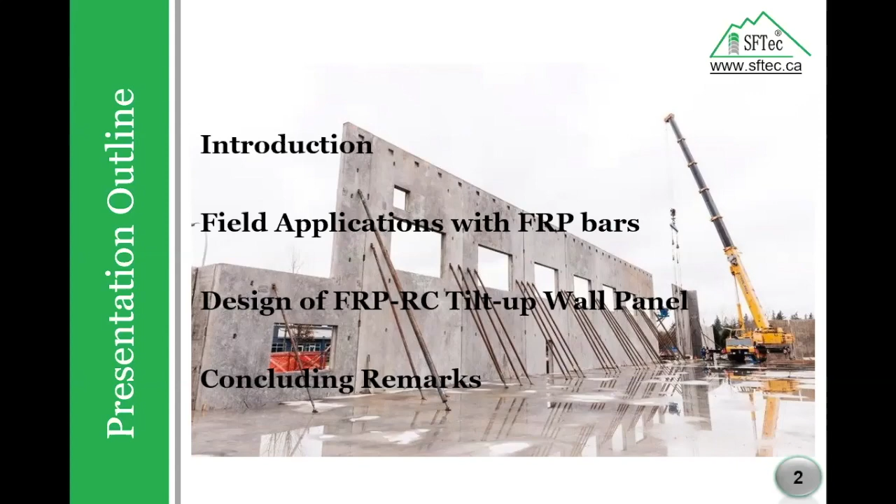Today I am going to talk about design of tilt-up wall panels using fiber reinforced polymer bars. In the next slides, I will go through a brief introduction, field application with FRP bars, design of FRP-RC tilt-up wall panels, and finally I will give some concluding remarks.

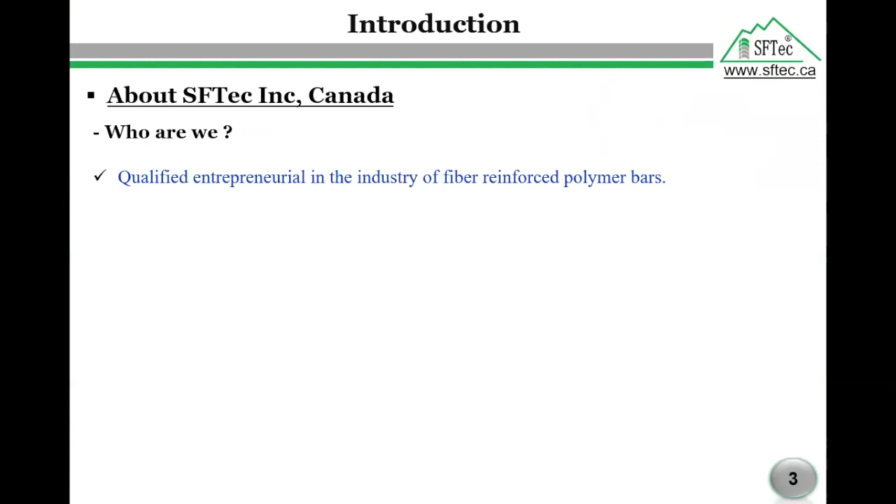I would like to introduce our company, SFTec. Who are we? SFTec is a professional entrepreneurial industry in the business of composite rebar. What do we do and who do we work with? SFTec is working closely with national and international engineering firms and government departments in the construction of parking facilities, water treatment plants, and retaining walls, as well as other structures in the field.

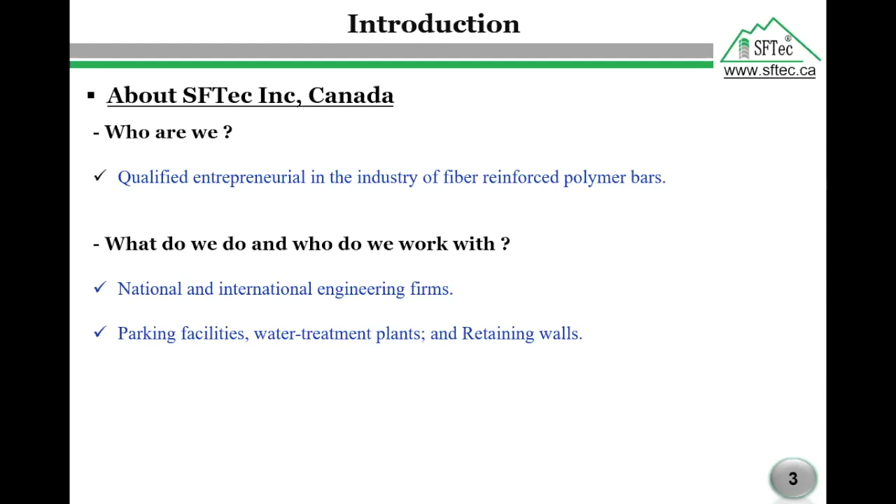What is our focus? SFTec is focusing on the market of FRP rebar application in North America and beyond, through providing complete design for new structures reinforced with FRP bars, and conducting research and development strategies to ensure continuous improvement of SFTec products.

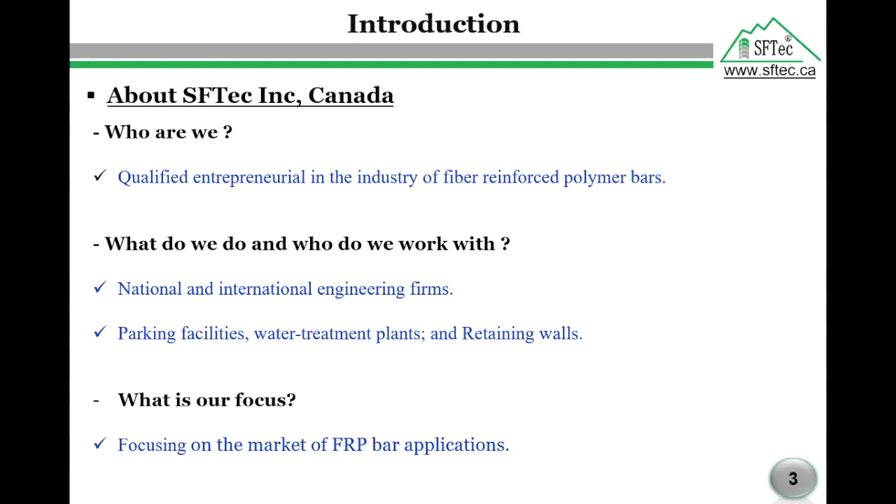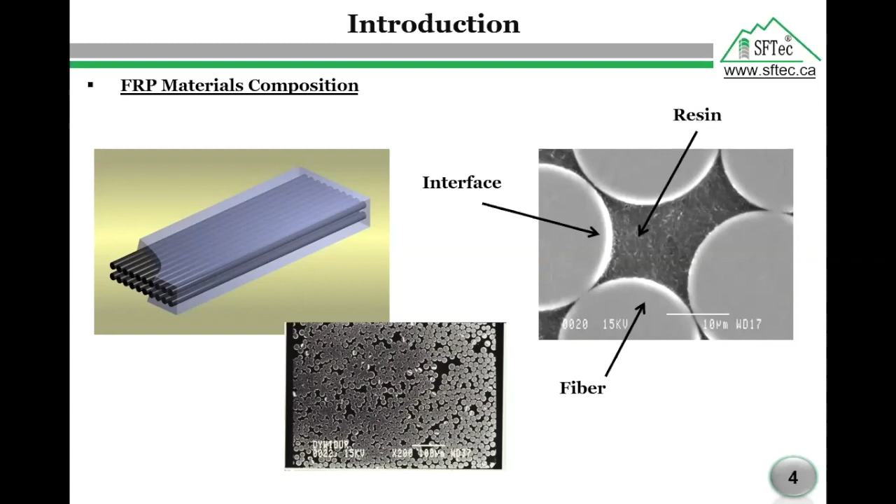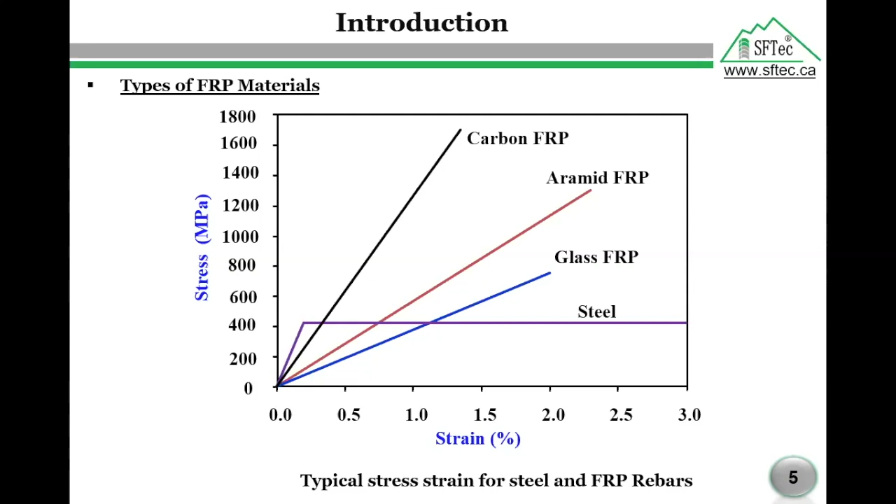In our presentation, we will focus on the FRP bars. What are the types of FRP? In the market, we have types of FRP: glass FRP, aramid, and carbon, and recently we have a type called basalt FRP. As we see in this stress strain curve for steel and FRP bars, there is only one difference between steel and FRP bars: the FRP bars are linear up to failure without any ductility point or yielding.

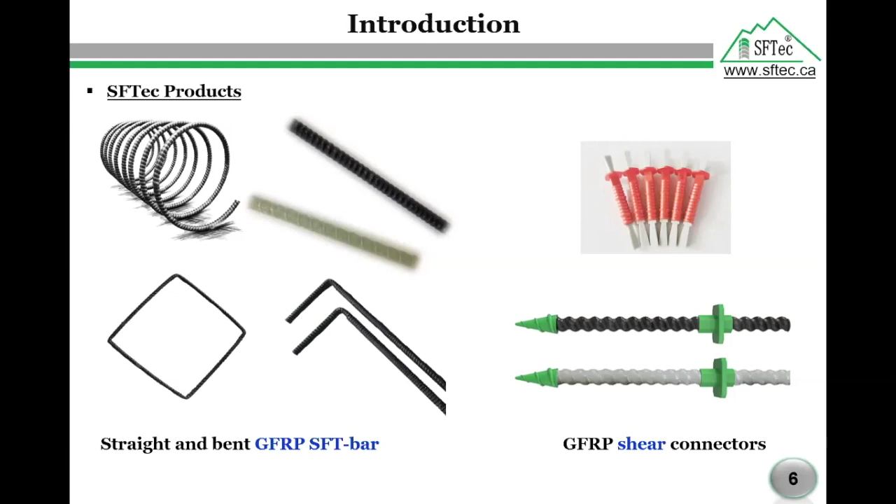In our company, we are mainly focusing on the production of GFRP materials as straight bars, bent bars, closed loops, and spirals. We also have a product called GFRP connectors for sandwich panels.

Why must you use GFRP SFT-bar instead of conventional steel bars? In the last 10 years, FRP bars have been used successfully in hundreds of bridges, parking lots, tanks, and marine structures across Canada and US, as well as other parts of the world.

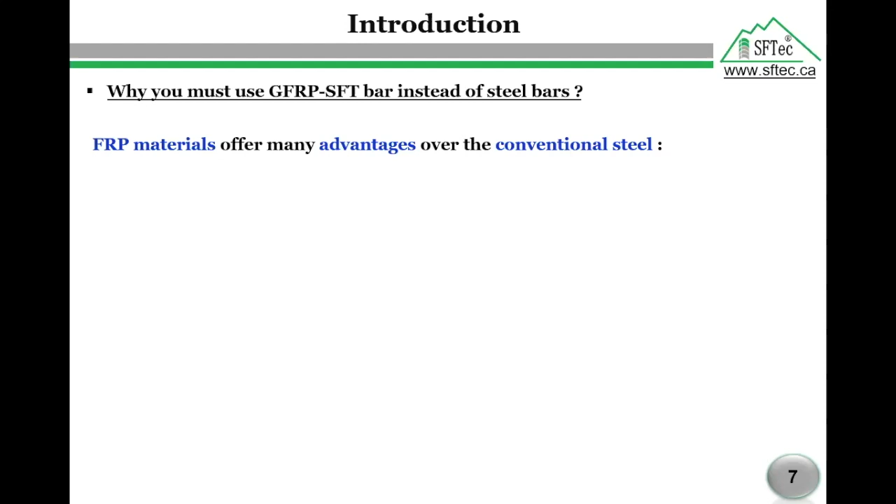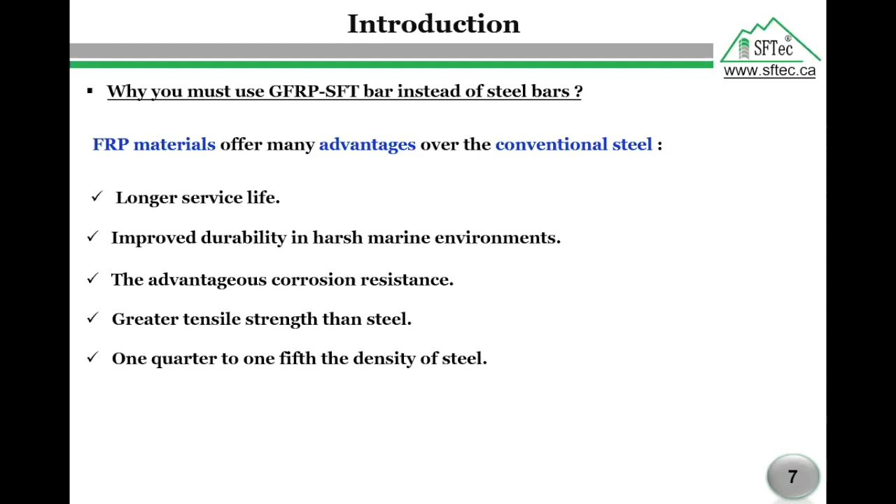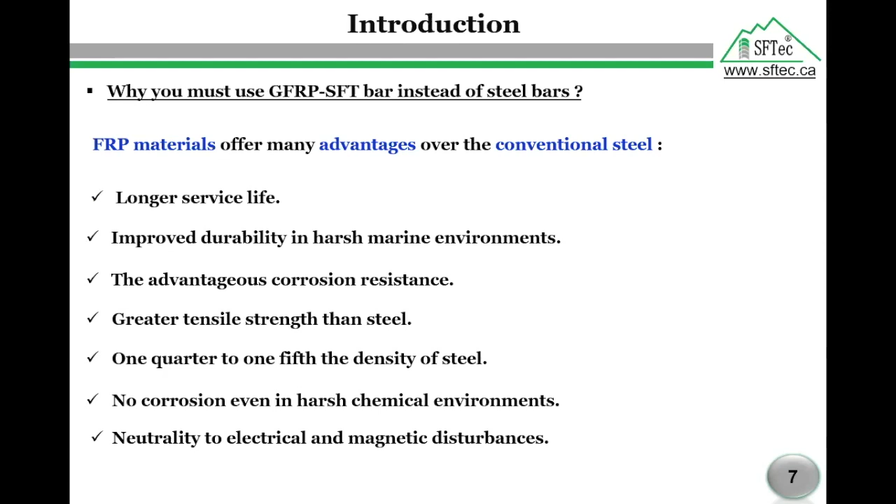FRP materials offer many advantages over conventional steel bars, like longer service life, improved durability in harsh marine environments, the advantage of corrosion resistance, high tensile strength compared to the yield stress of steel, lighter than steel, no corrosion even in harsh chemical environments, and neutrality to electrical and magnetic disturbance. SFTec product versus existing standards.

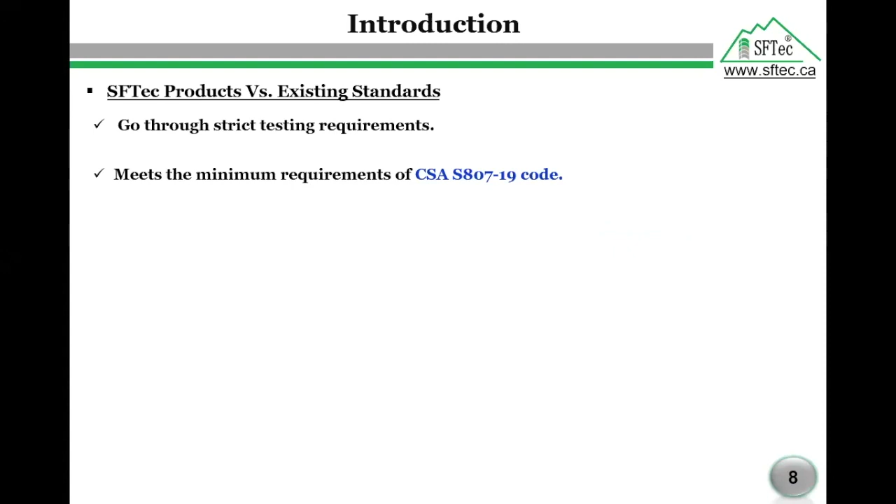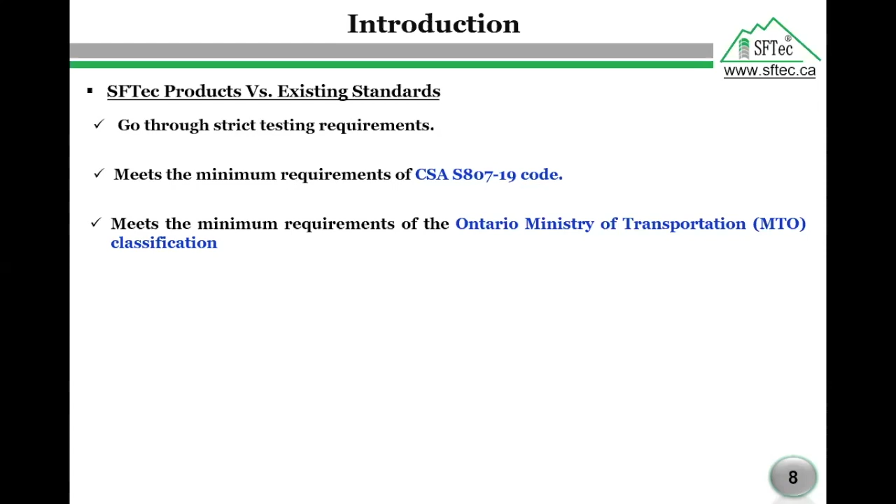Our materials go through strict testing requirements before they are approved for the market as a cost-effective reinforcing material instead of corrosive steel bars. The bar satisfies the minimum requirement of the specification for fiber reinforced polymer code CSA S807 to the year 2019. The bars also satisfy the minimum requirement of the Ontario Ministry of Transportation in Ontario province.

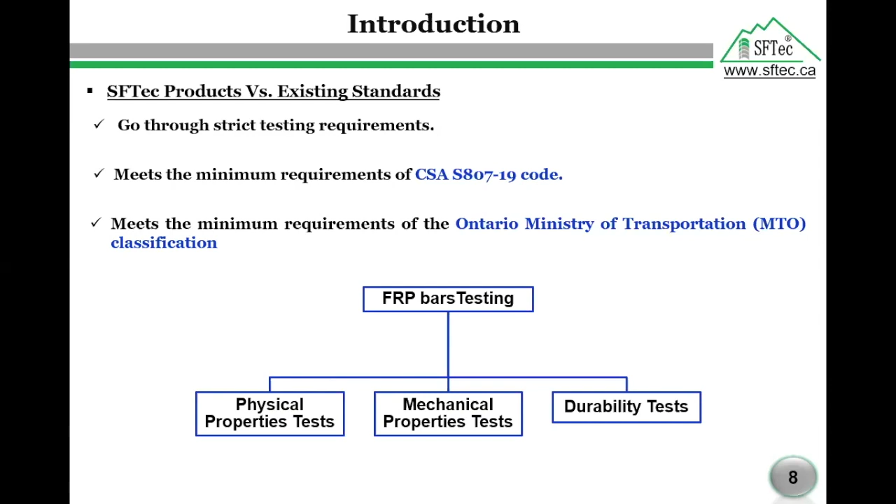The FRP bars testing are classified into three categories: physical properties test, mechanical properties test, and durability test.

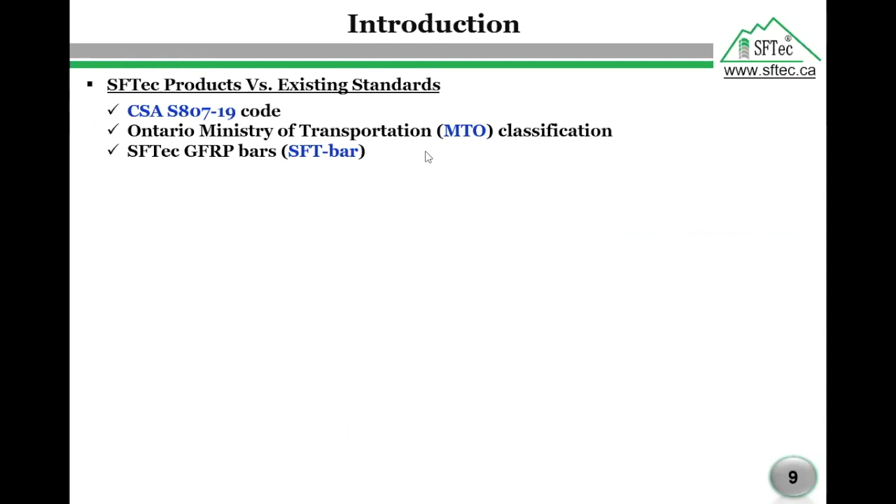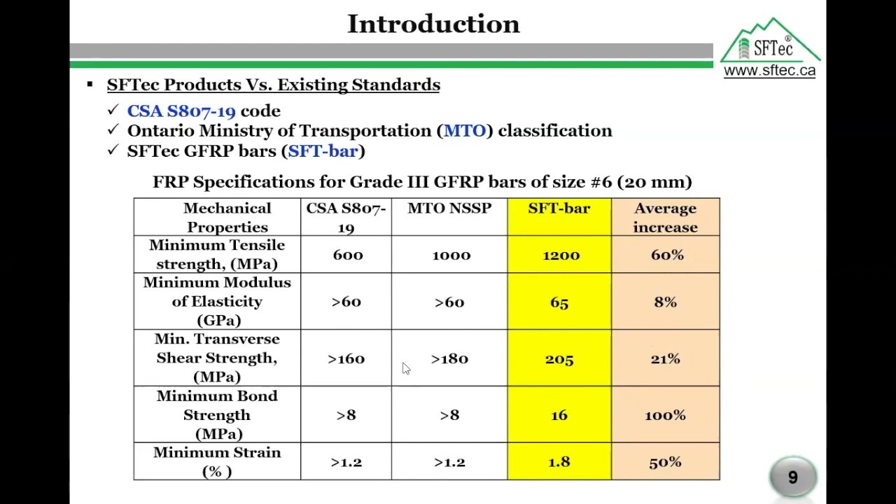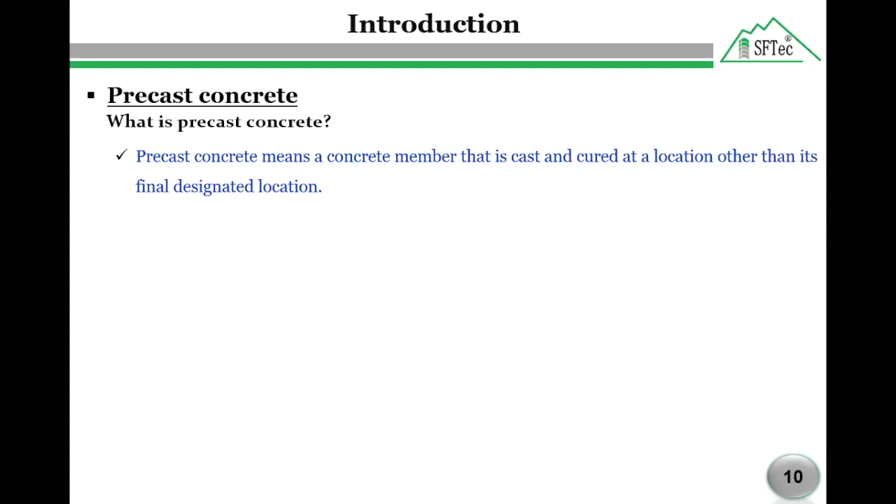Now I will talk about precast concrete. What is precast concrete? Precast concrete is a construction product produced by casting concrete in a reusable mold or form, which is then cured in a controlled environment, transported to the construction site and lifted into place. In contrast to standard concrete, which is poured into site-specific forms and cured on site.

What are the types of precast concrete? Precast concrete members are classified into: number one, architectural precast concrete; number two, structural precast concrete. The architectural precast concrete refers to concrete elements that are used as non-structural cladding elements, and their most common use is in precast curtain walls, as we see here on our left side.

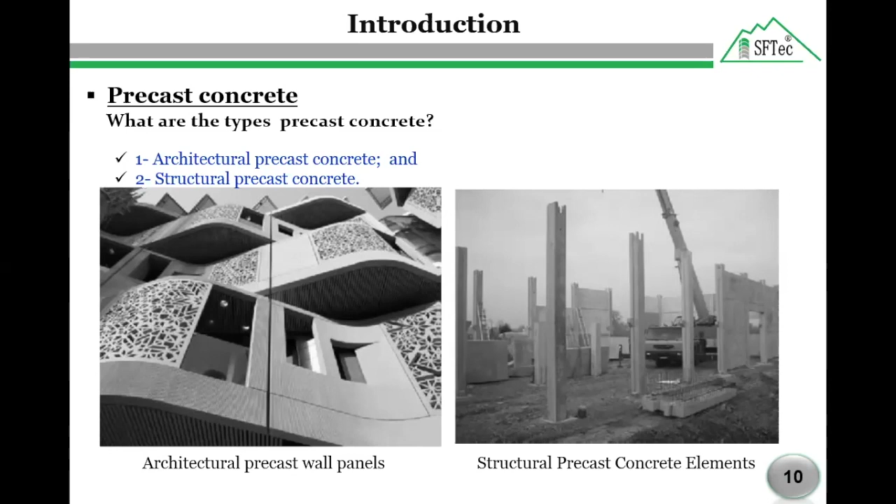Structural precast concrete includes all elements of building: structural frame, floors, roof slabs, columns, and walls, as we see on our right side. What are the advantages of precast concrete?

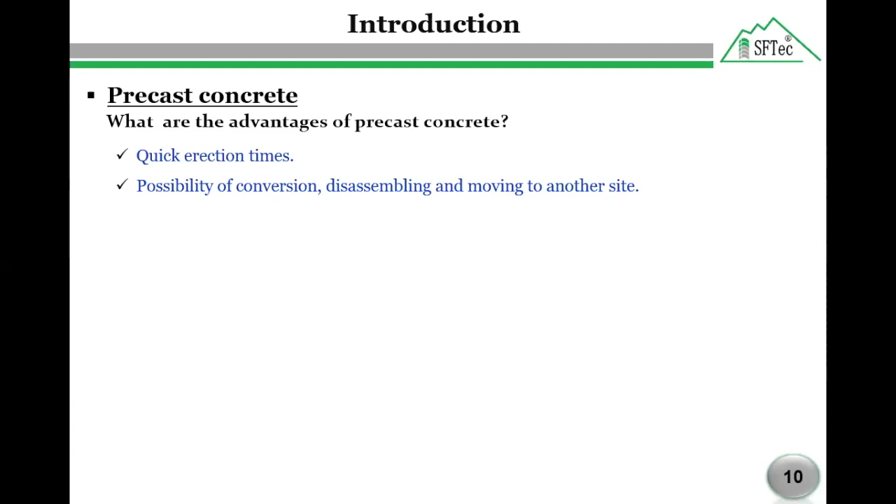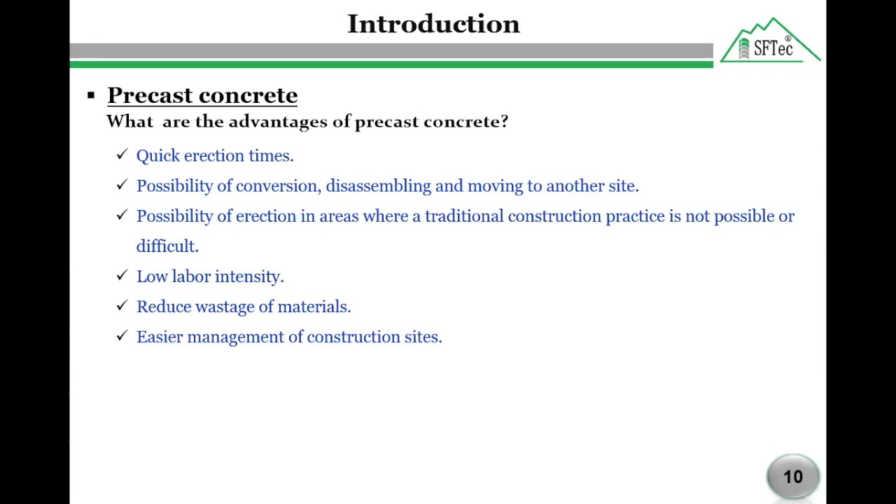Quick erection time, possibility of conversion, disassembling, and moving to another site. Possibility of erection in areas where traditional construction practice is not possible or difficult. Low labor intensity, reduce wastage of material, easier management of construction sites. Better overall construction quality, ideal fit for simple and complex structures.

What are the differences between total precast and mixed precast construction? Total precast construction refers to a building that can be constructed totally from structural precast concrete members like columns, walls, beams, or slabs. As we see here on our left side, a total precast concrete parking garage under construction.

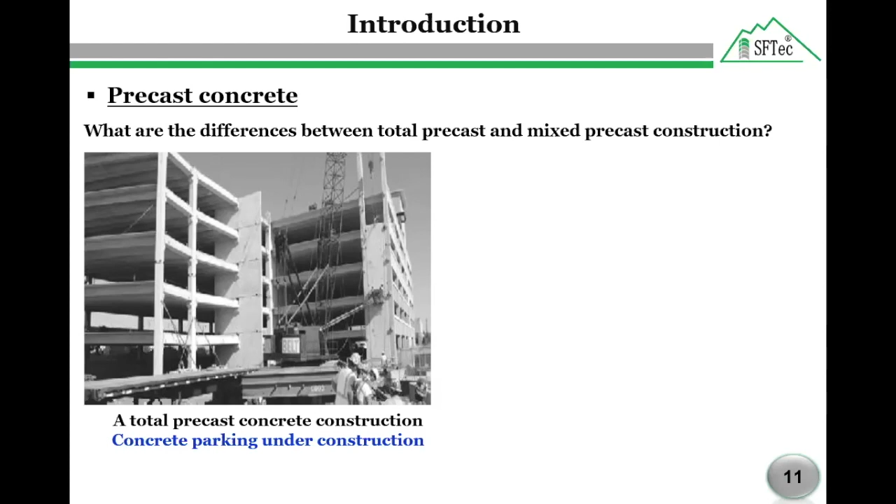In mixed precast construction, some structural elements of the building are made of precast concrete members like roof, slabs, or floors, while the others are made of cast in place concrete, steel, or masonry. It combines the benefits of both precast and conventional construction. The photo on our right side represents a mixed precast construction of steel frame structure combined with hollow core slabs.

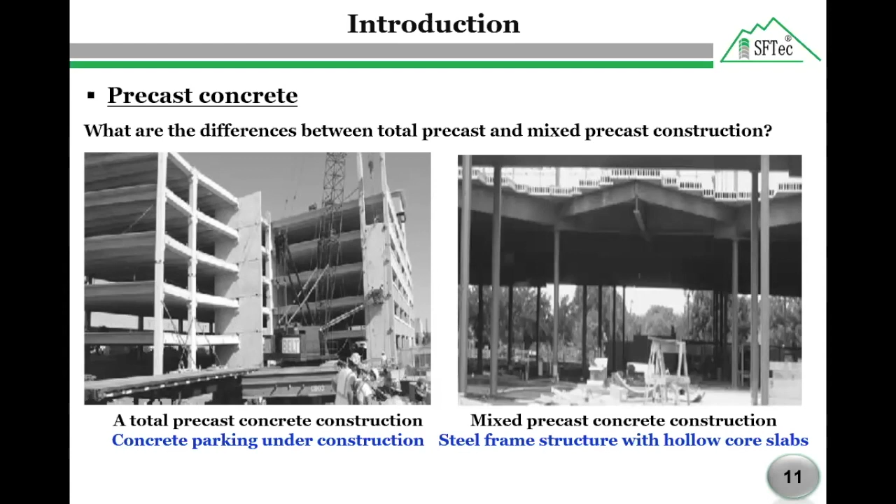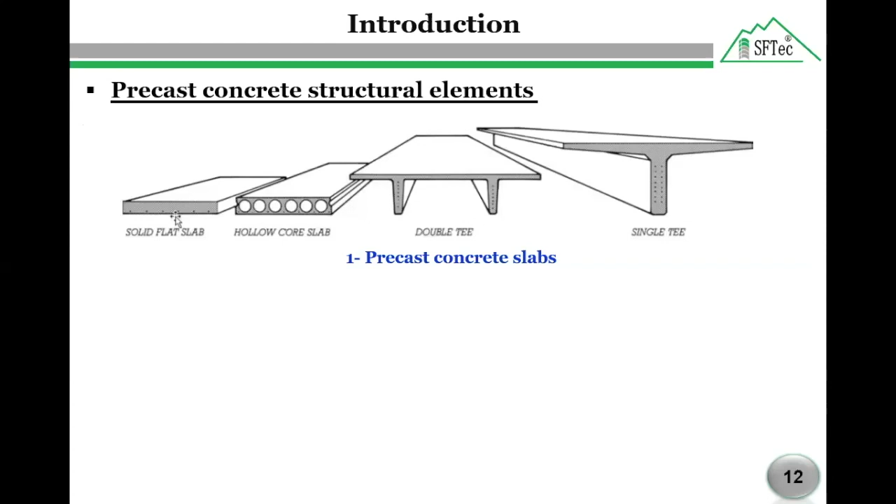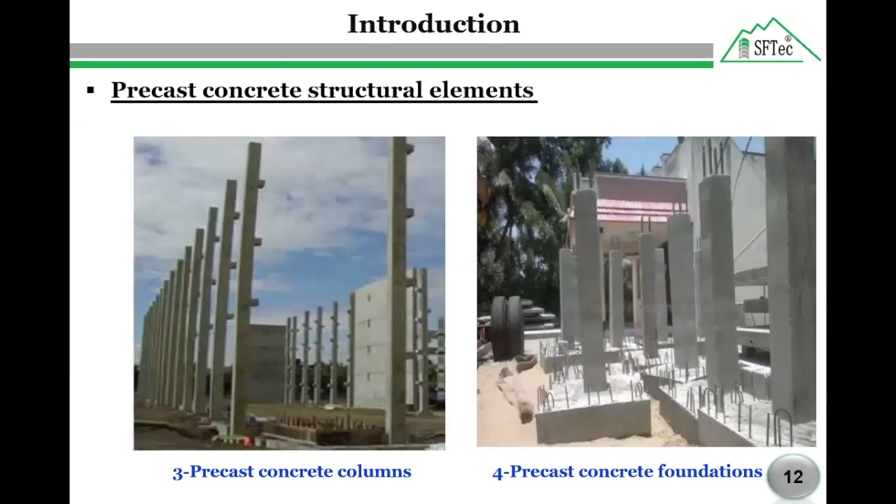Precast structural elements: we have many structural elements that can be used in the precast industry. Number one, precast concrete slabs. Number two, precast concrete beams. Number three, precast concrete columns. Number four, precast concrete foundations. Number five, precast concrete stairs. And finally, precast concrete walls.

In this presentation, I will focus on tilt-up wall panels. Tilt-up wall panels are essentially precast cast on site instead of traditional factory cast concrete members.

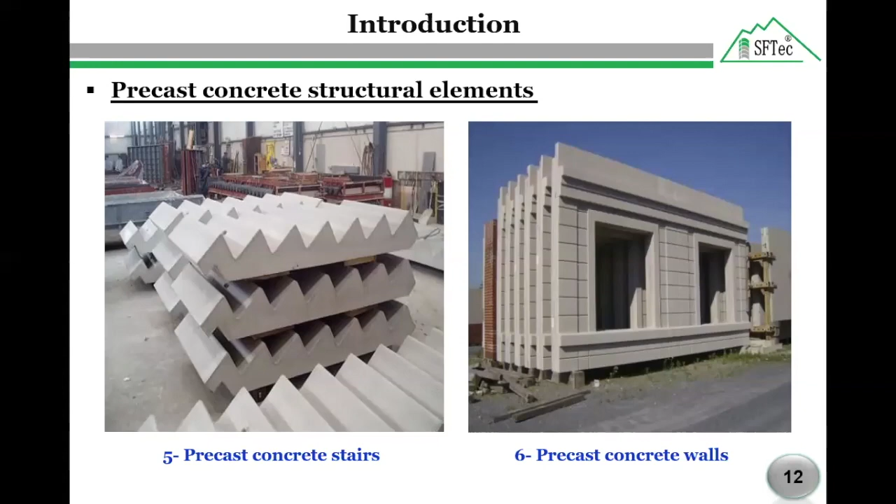In precast members, joint design plays an important role in ensuring the concrete components act as one piece. In most cases, sealing the joint space is necessary to prevent infiltration of groundwater or liquids carried by the structures.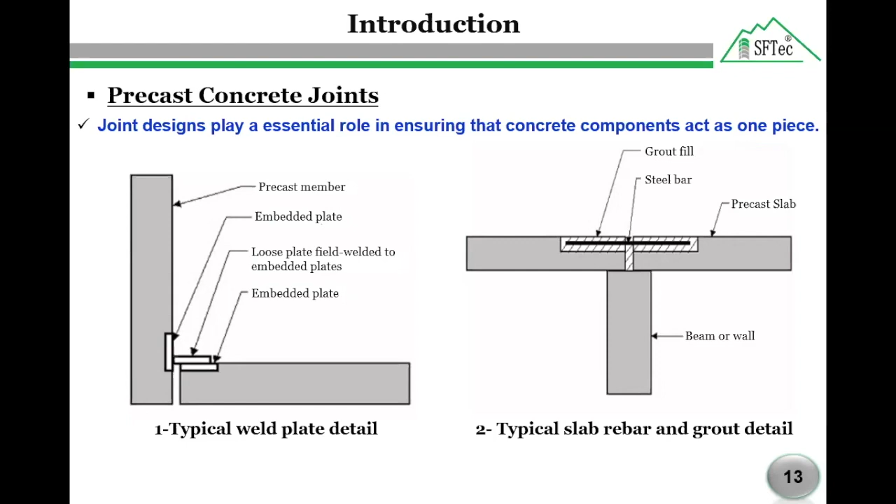As we see here on our left side, the photo represents a beam to column connection. The detail of beam to column connection using steel welded plates. The beams and the columns have embedded plates to be welded, forming the connection between the beam and column.

Slab to beam connections: as shown on our right side, the hollow core slabs are set on bearing pads on precast beams. Steel reinforcing bars are inserted in the slab keyways to span the joint. The slab is then grouted. The slab may remain untopped as shown on our right side, or cast concrete topping is generally used over the slabs.

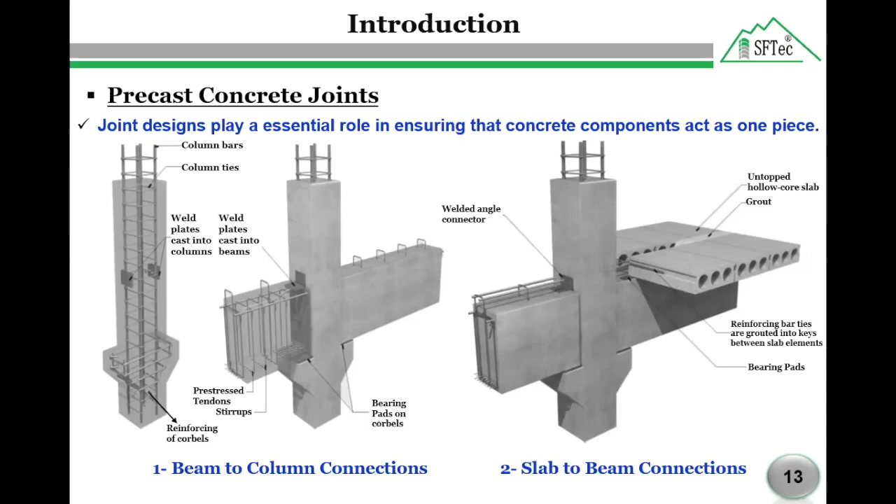The topping provides structural integration of slab units and increases the floor fire resistance and sound insulation.

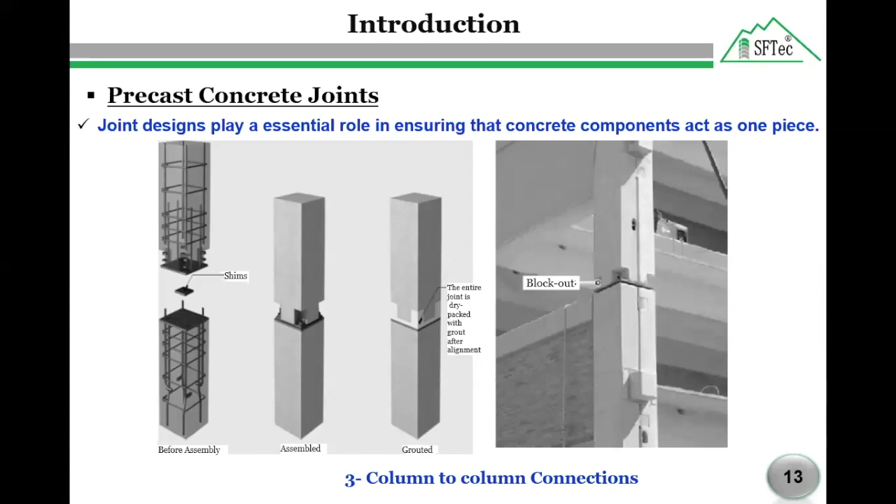Finally, we have column to column connections. A column can be connected to another column by casting a concrete shoe in the upper column and putting anchors with a plate in the lower one. After that, they are assembled together, lined up, and the spacing between the empty spaces will be grouted.

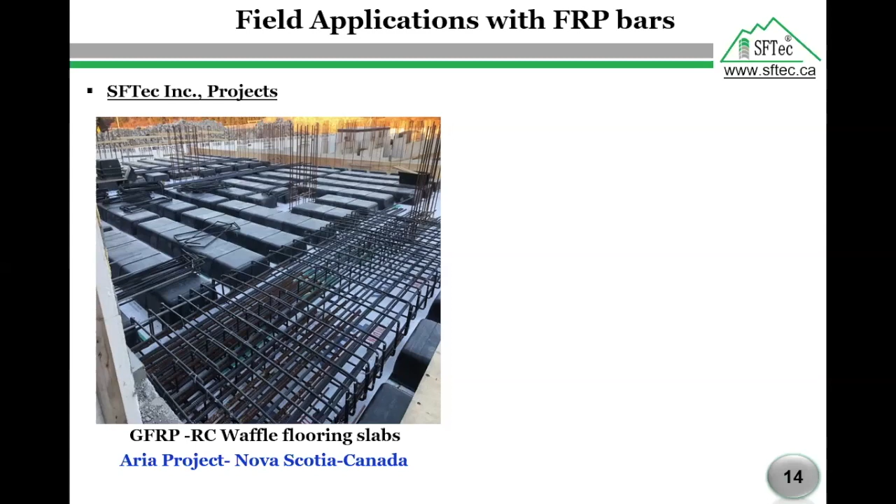I would like to highlight our national and international projects with SFTec rebars. The first application is the first worldwide waffle slabs, reinforced with GFRP straight and bent bars, in the Aria project. Another application is for casting water breaks using our rebars.

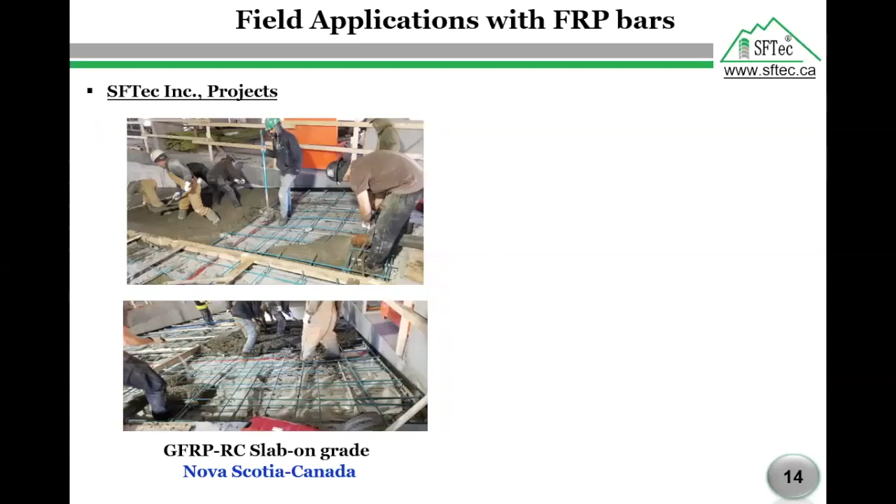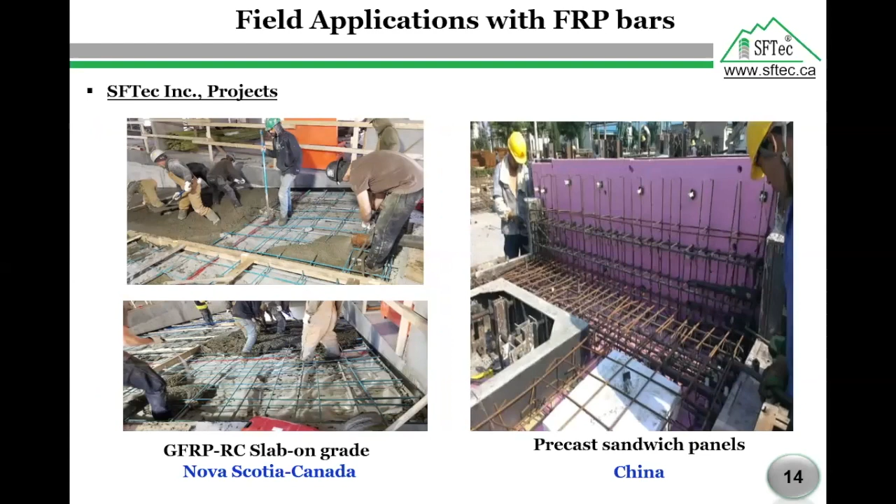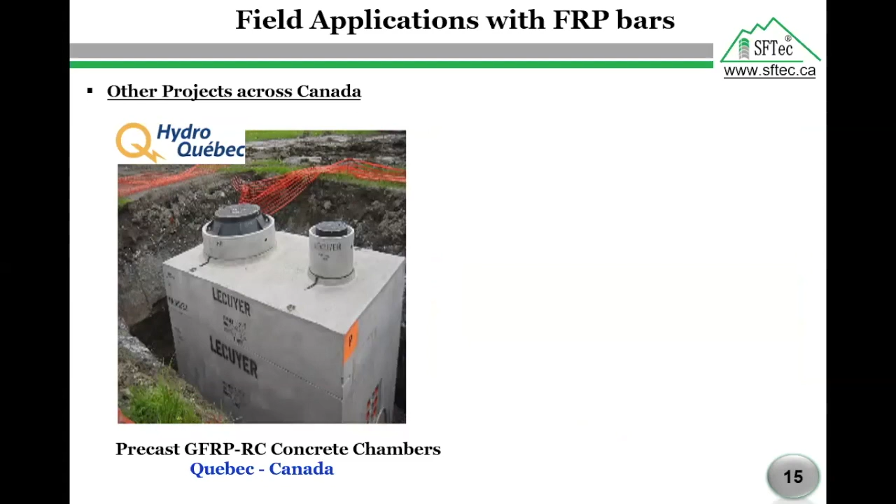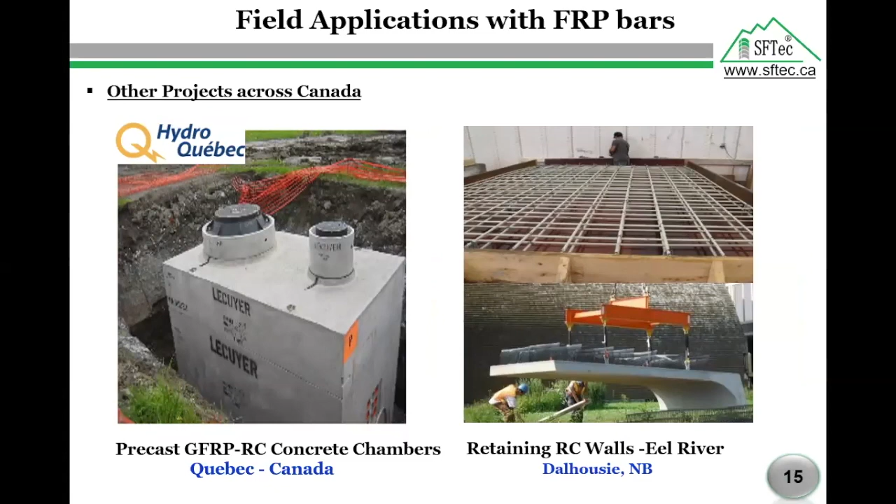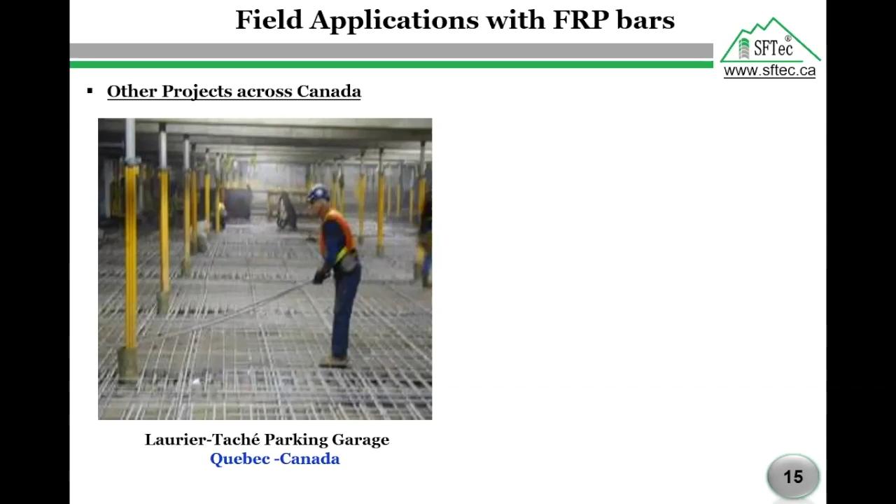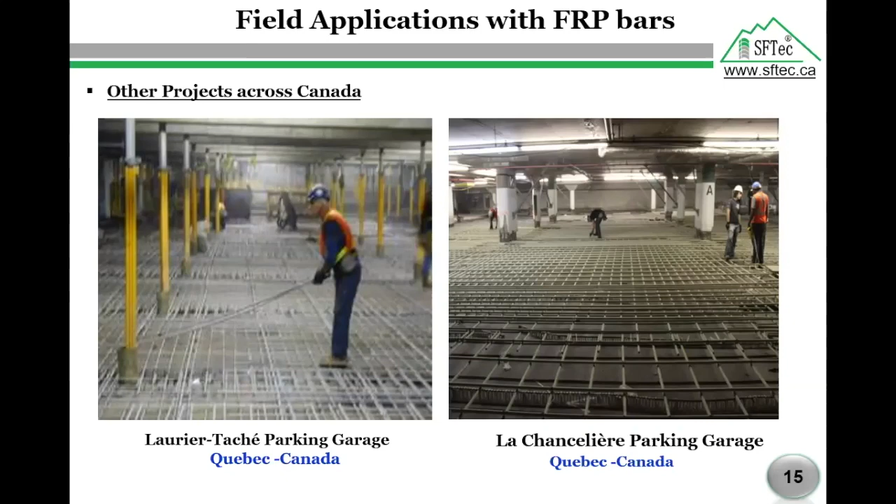Another application is for reconstructing the deteriorated slabs of one-way slabs in the Laurier-Taché parking garage using GFRP bars, as we see on our left side. The last field application today is a flat plate structure in the La Chancelière parking garage in Quebec City. As shown on our right, the flooring slabs of this two-way parking garage are totally reinforced with GFRP bars.

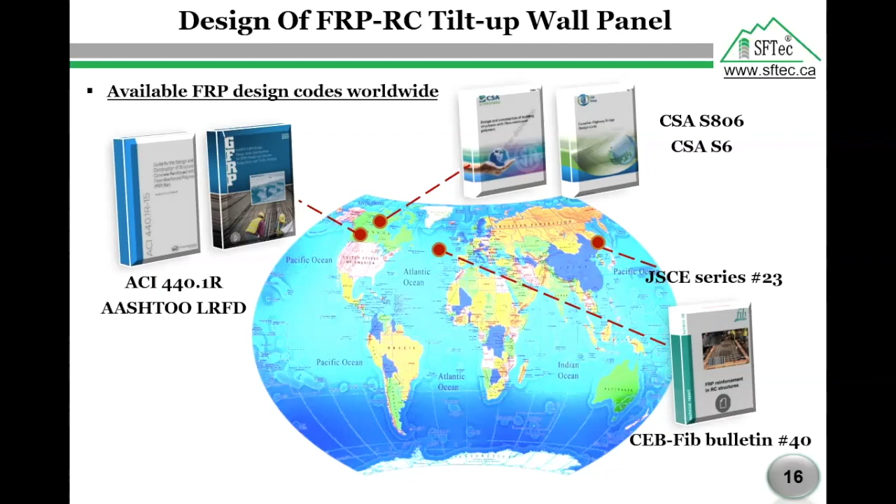It is worth mentioning that several design codes and guidelines are available around the world for the design of structural elements reinforced with FRP bars. Now I will shift to the design of tilt-up wall panels for flexure using FRP bars.

Chapter 23 in the Canadian standard CSA-A23.3 for concrete structures reinforced with steel bars presents the design philosophy of this kind of wall. Here I will give the general idea, however you will see all the formulas in the coming slides.

All of us know that tilt-up concrete walls are a well-known form of construction in North America. Tilt-up wall panels are typically slender axial load-bearing members subjected to out-of-plane lateral load from wind and seismic action. Because of their slenderness ratio, they shall be designed for second-order P-delta effect to ensure structural stability and satisfactory performance under specified loads.

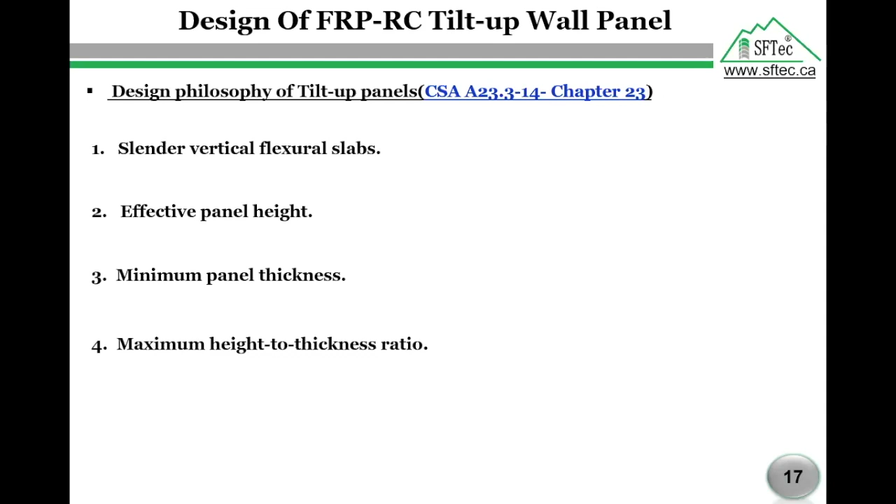The effective panel height shall be the center to center distance between lateral supports. The minimum panel thickness of a prismatic load-bearing panel without stiffening elements shall be 140 mm. The maximum height to thickness ratio shall be 50 for panels with a single mat of reinforcement at the mid-depth of the wall, or 65 for panels with mat reinforcement near each face.

And finally, the vertical stress should be less than 0.09 times the concrete resistance factor times the concrete compressive strength.

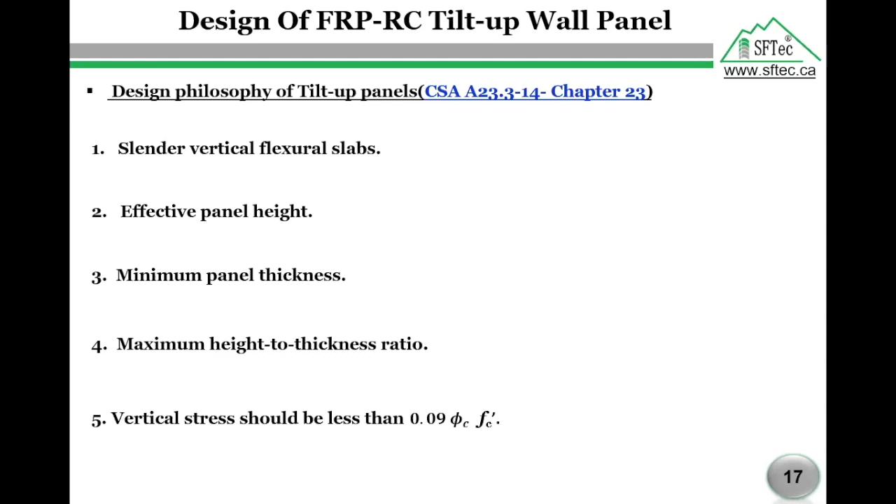There are some general issues that should be considered in the flexural design of any structural member reinforced with FRP bars. I will talk here about these issues according to the Canadian standard S806 for the year 2012. First, we have three possible modes of flexural failure of a concrete section reinforced with FRP bars.

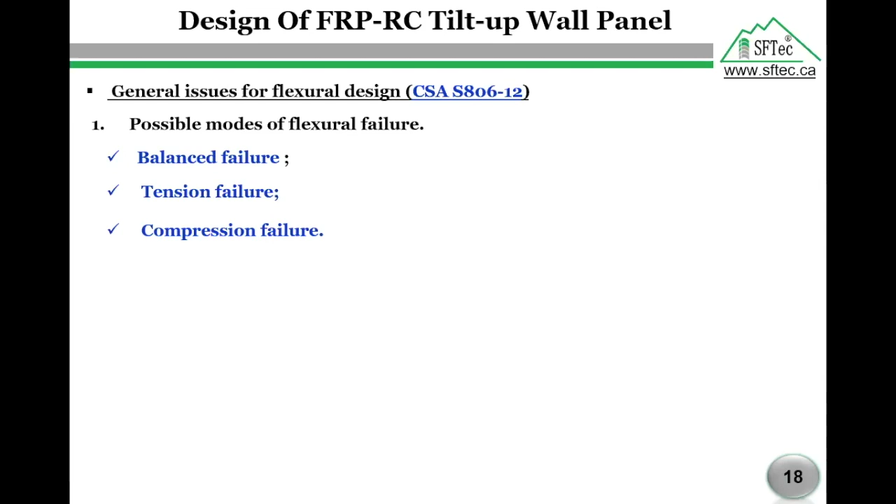The first is balanced failure, which represents simultaneous rupture of FRP bars and concrete crushing. Second, tension failure, which represents rupture of FRP bars before concrete crushing. Third, compression failure, which represents concrete crushing while FRP bars remain in the elastic range with a strain level smaller than the ultimate strain.

There is a design difference between FRP and steel: FRP is linear up to failure and exhibits no ductility or yielding. Another major difference is that serviceability will be more of a design limitation in FRP reinforced members than with steel. Due to the lower elastic modulus of the FRP bar, deflection and crack widths will govern the design.

Load factors and load combinations: the Canadian standard S806 uses the same load factors as the Canadian standard 23.3. The load combinations are also the same as in the Canadian standard 23.3, which is based on the National Building Code of Canada for the year 2015.

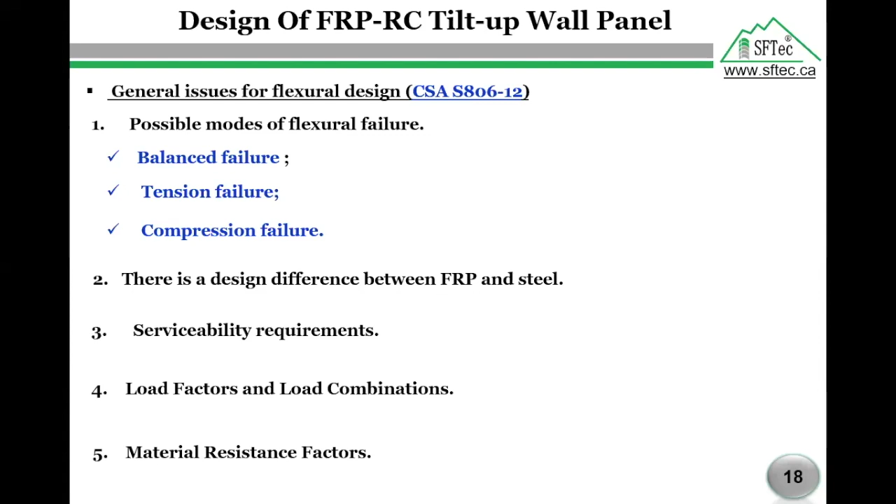Concrete and steel resistance factors remain the same as in the Canadian standard 23.3, while the FRP bar resistance factor equals 0.75 for all FRP structures, reinforced or pre-stressed.

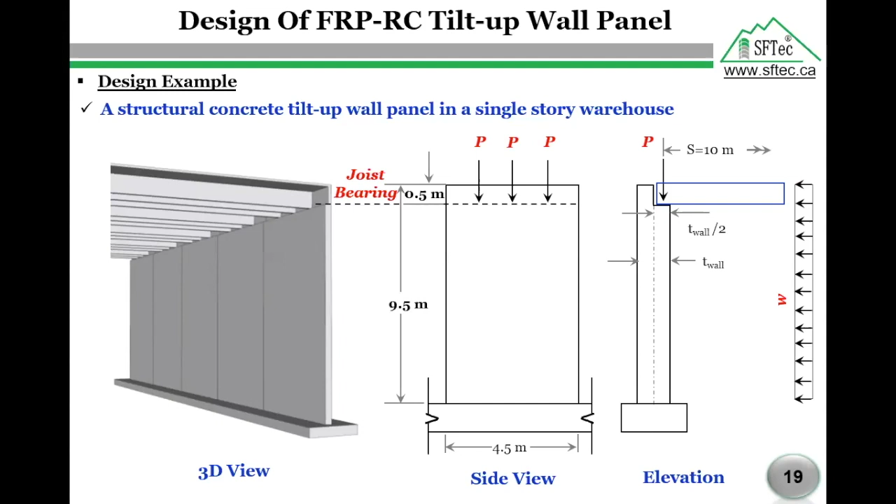We have a design example for a structural concrete tilt-up wall panel in a single-story warehouse building. The wall provides load resistance from three joists, as we see here acting on this wall, and lateral resistance from wind load.

The total height of the panel equals 9.5 meters. The entire width of the panel equals 4.5 meters, as per the presented side view and elevations.

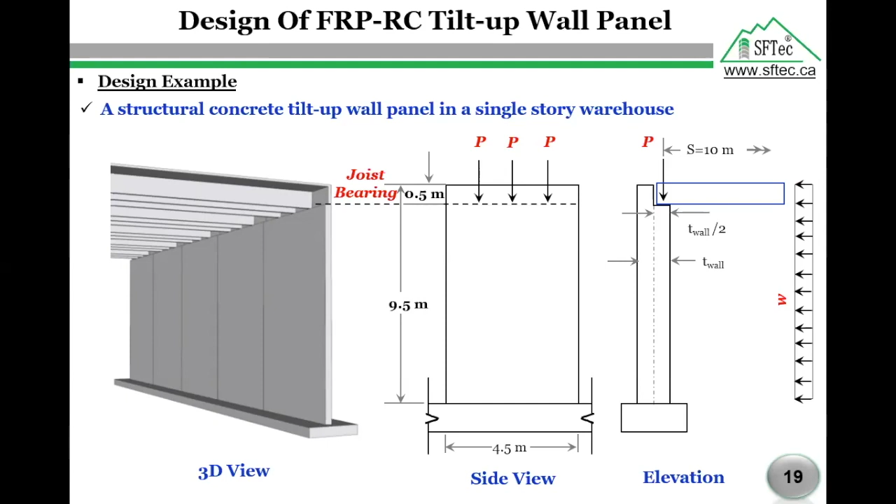The given design data here: the roof loads, the applied concentrated load and live load from each joist are 10.5 kilonewton and 11 kilonewton respectively. The applied wind load equals 1.5 kilonewton per meter square. The concrete strength equals 40 MPa.

GFRP safety bar number 7 is chosen as a vertical reinforcing bar, while safety bar number 4 is chosen as a horizontal reinforcing bar. What we will do in this is design this wall for flexure.

In the next slide, we will apply the above mentioned design philosophy of tilt-up wall panel according to the Canadian standard CSA A23.3 to the year 2014 and the general issues for flexure according to the Canadian standard S806 on this example. In order to have a detailed flexural design for this wall, including serviceability limit state check, these following design steps will be performed in the next slides.

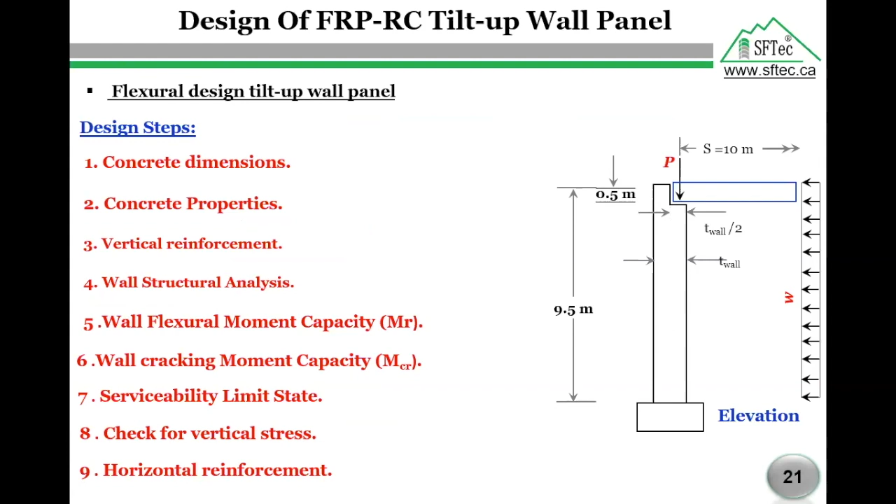The first step is to calculate the concrete dimension. The unbraced length here is simply the total height of the wall minus 0.5 meters. So finally we have the unbraced length equals 9,000 millimeter or 9 meters. The wall thickness: in this example, I will use a single mat reinforcement at the mid thickness of the wall, so the wall thickness simply equals the unbraced length in millimeter over 50. Finally, the wall thickness is 180 millimeter.

The eccentricity from the roof loads equals 2/3 of the wall thickness over 2. So we will multiply 2 over 3 by wall thickness over 2. We have the wall thickness 180 millimeters, so 2 over 3 by 90 millimeters.

The second step is to calculate the concrete properties in order to use them in advance. The given concrete compressive strength equals 40 MPa. According to the Canadian Code A23.3 or the CSA-S806, the concrete elastic modulus equals 4,500 by the square root of the concrete compressive strength.

The stress block parameters alpha 1 and beta 1 can be calculated using these equations as a function of the concrete compressive strength. So alpha 1 equals 0.79, beta 1 equals 0.89.

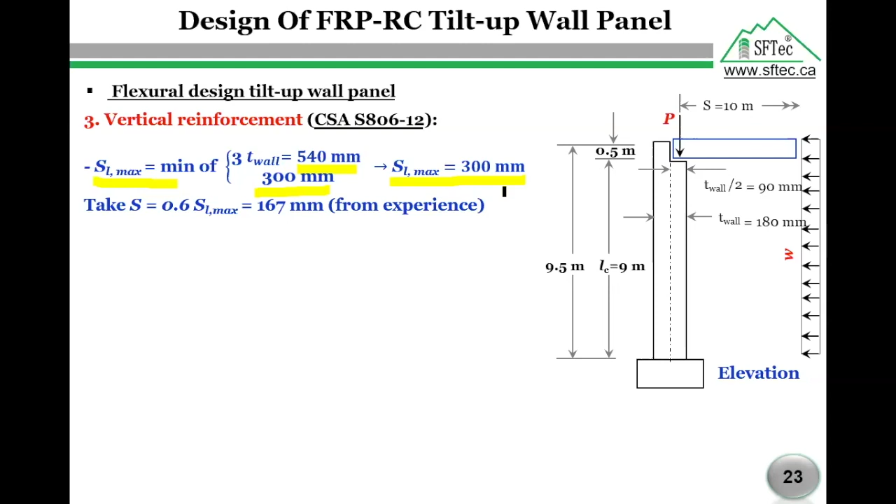From experience, in order to have a safe design controlled by crack widths, take S equals 0.6 from the maximum spacing between bars. So we agreed to use bar number 7 and the spacing 167 millimeter at the middle thickness of the wall.

Now we can calculate the total amount of flexural vertical reinforcement that will be used using this equation. Finally, we need 27 number 7 bars to bear the entire width of the wall. So we have the amount of reinforcement, we have the dimension, so we can calculate the flexural reinforcement ratio. The flexural reinforcement ratio equals 0.013.

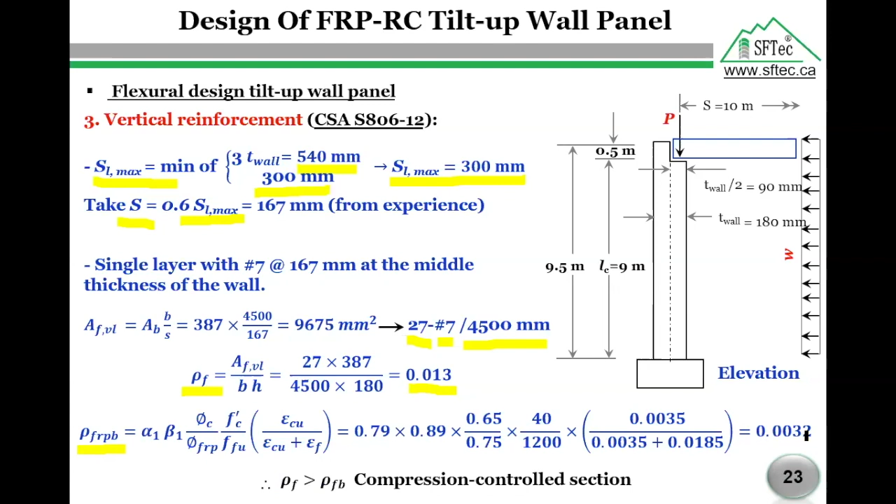The balanced flexural reinforcement ratio, according to the Canadian code S806, can be calculated using this equation. So the balanced flexural reinforcement ratio equals 0.0032. By comparing the flexural reinforcement ratio of the vertical reinforcement with the balanced flexural reinforcement ratio, the section is compression controlled, which is the desirable failure mode according to the Canadian standard S806.

Step number 4: in this step, we will perform wall structural analysis. In order to do so, first we need to calculate the total gravity loads as well as the wind loads along the wall height. As I mentioned earlier, we have dead load from 3 joists and live load from 3 joists.

So the total dead load we have equals 3 by 10.5. So the total dead load equals 31.5. Using the same criteria as the dead load, we have the total live load equals 33 kilonewton.

The own weight of the wall at the mid height is simply equal to the concrete density by the wall thickness by the area at the mid height of the wall. So finally, the wall weight equals 97.2.

The wind load along the wall height equals the given wind load, which is 1.5 kilonewton per meter square, by the entire width of the wall. So finally, we have 6.75 per meter run.

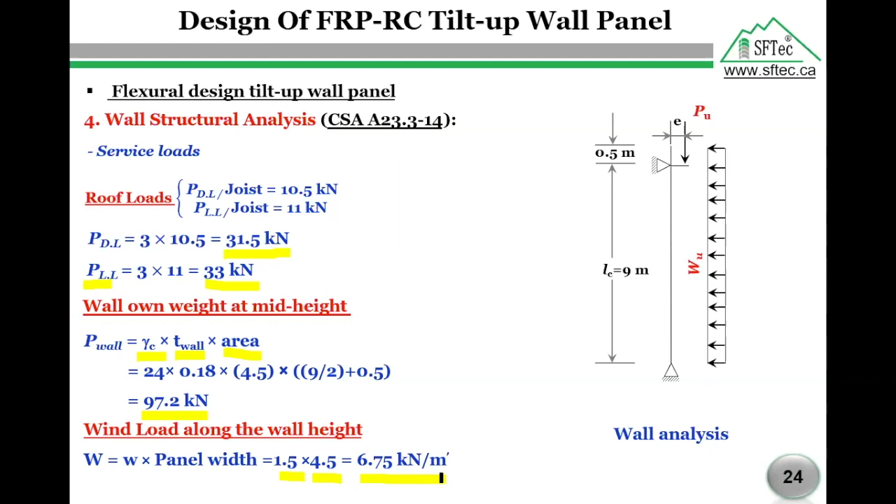After calculating the service loads, the next step is to calculate the ultimate loads as per the National Building Code of Canada and the Canadian Standard 23.3.

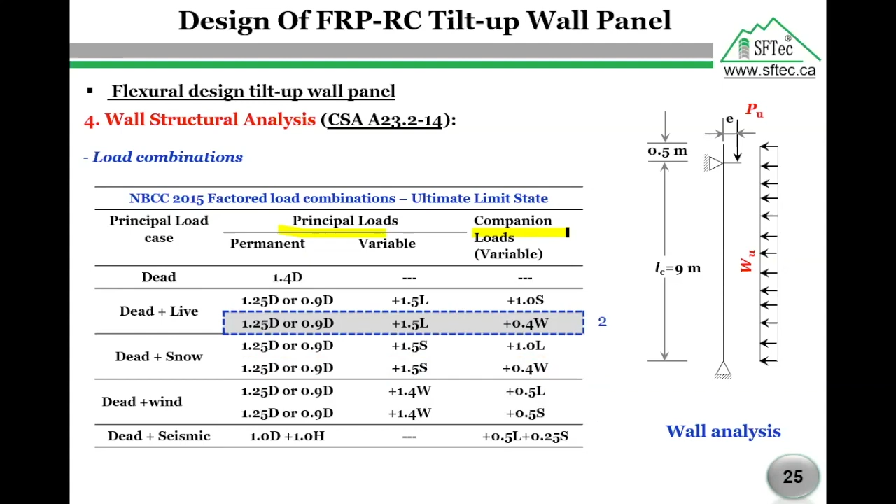So we agreed to use load combination number 2 as calculated before. Dead load equals 31.5, live load equals 33 kilonewton, wall load equals 97.2 kilonewton, W equals 6.75 kilonewton per meter run. Now we will calculate the maximum wall forces.

Ultimate load 1 represents the total factored dead load plus the factored live load. In this load combination, we have 1.25 dead load, 1.5 live load. By applying these load factors, we get 88.8.

Ultimate load 2 is the dead load from the own weight of the wall. We agreed that the load factor for the dead load is 1.25, so 1.25 multiplied by the wall load. Finally we have 121.5.

The ultimate wind load equals 0.4 multiplied by the wind load. So 0.4 multiplied by 6.75 gives us 2.7 kilonewton per meter run.

Now, after calculating the ultimate loads, we can calculate the maximum factored moment. The maximum factored moment MF at the mid height of the panel, including the magnification factor due to the P-delta effect, equals MB times delta B.

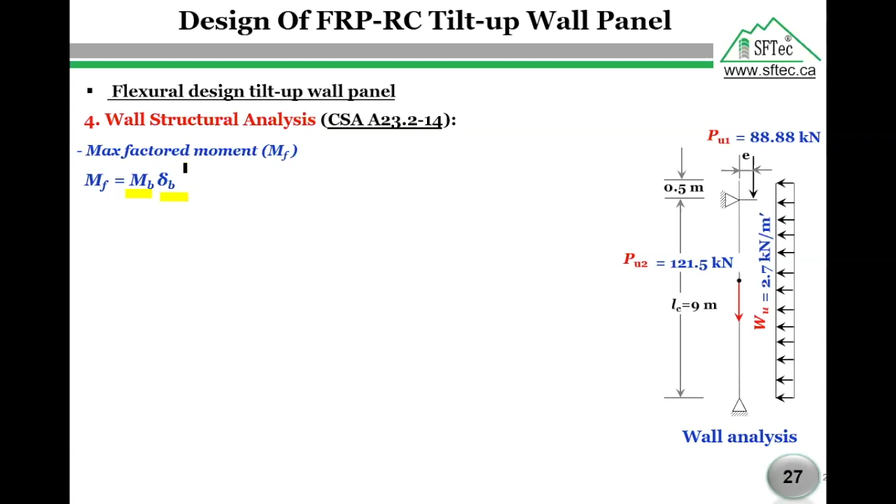MB is the maximum factored moment in the panel due to ultimate load at the last stage at which deflection is computed, not including the P-delta effect. To include the P-delta effect, MB should be multiplied by delta B, which is a moment magnification factor to reflect the P-delta effect at ultimate loads.

The bending moment diagram on our right side represents the bending moment diagram due to wind loads and due to the eccentric gravity loads. So easily we can calculate MB, which finally will equal 37.4.

Now we need to calculate delta B. Delta B can be calculated easily from this equation. All the factors here are known for us: the ultimate load 1, the ultimate load 2, the unbraced length, and the concrete elastic modulus.

So we need to calculate the cracked moment of inertia. The cracked moment of inertia can be calculated according to the Canadian Standard S806 of the year 2012. Using this equation, we will get I cracked.

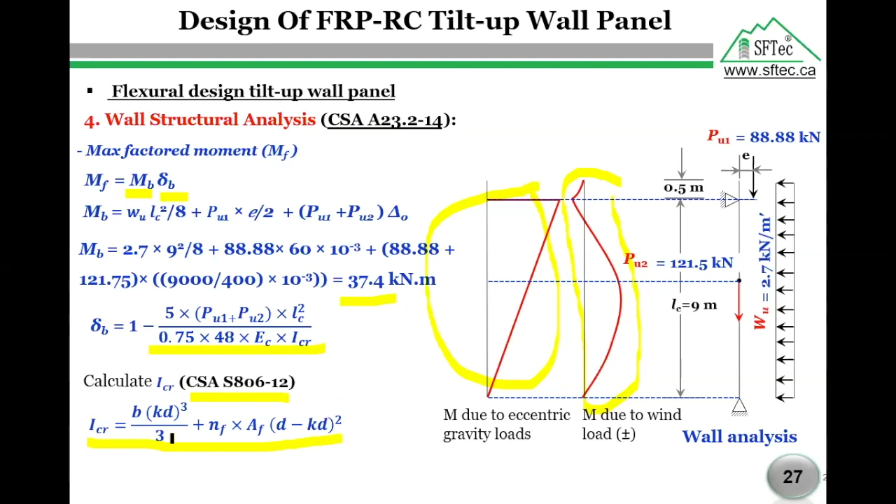As we see here in this equation, all factors are known except K and NF. The factor K can be calculated easily from this equation, which mainly includes the flexural reinforcement ratio and NF. NF, or the modular ratio, is the ratio between

the elastic modulus of the used FRP bar to the elastic modulus of concrete. We have calculated rho F in the previous slides. So now we can calculate rho F by NF, which will equal 0.03.

So now we can calculate K. K equals 0.22. K by D is a factor in this equation, so we can calculate it to make it easier for us. K by D equals 0.22 multiplied by the flexural effective depth, which is equal to 90 millimeter, so K by D equals 20 millimeter.

And finally, the I crack is equal to 1.29 times 10 to the power of 8. So we calculated I crack. The next step is to calculate delta B.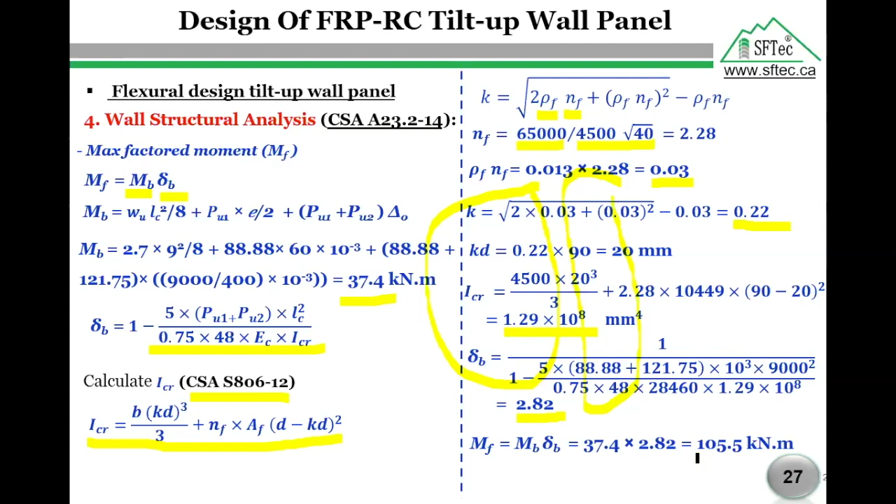Delta B equals 2.82. After calculating delta B and MB, we can calculate the maximum factored moment, which equals 105.5 kilonewton meter. So step number 5 is to calculate the wall flexural capacity.

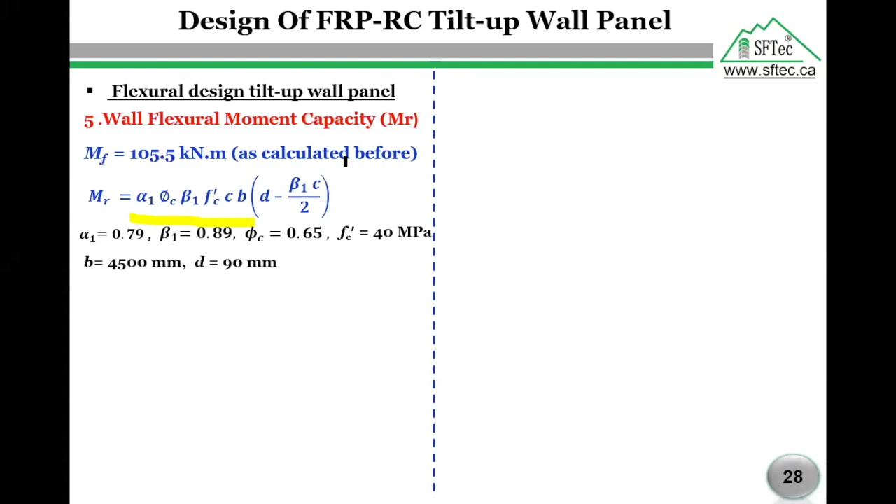The wall flexural moment capacity can be calculated using this equation according to the Canadian Standard S806. All the factors in this equation are known for us from the design data, or we calculated them before, like alpha 1, beta 1, phi c, fc, the entire width of the panel, and the effective flexural depth, except the neutral axis depth C.

From equilibrium, we can calculate C. C finally can be calculated by equating the compression force to the tension force in the section, and finally C equals 34.64 millimeter.

So the next step before calculating the wall flexural moment capacity, we need to check the ratio between the neutral axis depth to the effective flexural depth. The neutral axis depth C over D should be greater than this formula.

So we have here C over D equals 0.38, and this formula gives us 0.16. Now we can calculate the wall flexural moment capacity using this equation. The wall flexural moment capacity finally equals

212.54 kilonewton meter. By comparing the wall flexural moment capacity and the factored moment capacity, the wall moment capacity is greater than the maximum factored moment, which is good.

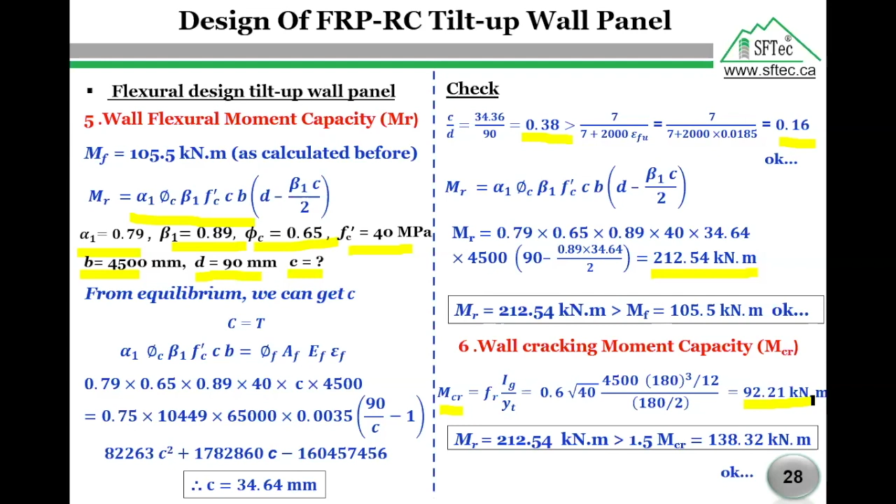As we agreed to have a successful design for this wall, we should check the serviceability limit state according to the Canadian standard S806 to the year 2012.

In order to do so, we have two checks. The first one is stress and strain limitation. The maximum stress in the used FRP bar under service load can be calculated using this equation. The Canadian standard S806 allows using 0.25 or less of the ultimate tensile strength of the used FRP bars.

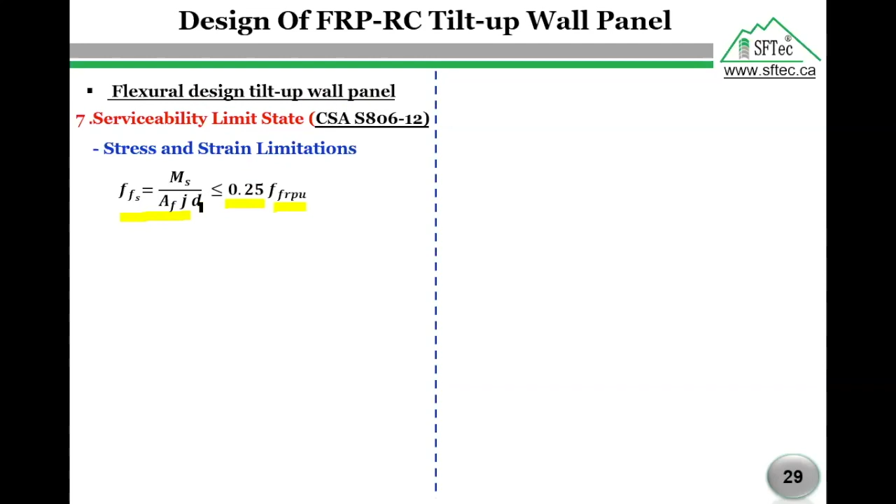Here we have AF, which is the total amount of reinforcement. We have the effective depth for flexure, D. We have MS, so we need to calculate MS first.

Using the previous criteria in calculating the maximum factored moment, the maximum moment in a panel due to service load can be calculated. To do so, the service load acting on the panel should be calculated first. And finally, the maximum moment without P-delta effect can be calculated.

After that, we will calculate delta BS in order to include the P-delta effect. So PS1 equals P dead load plus P live load, so we have 64.5. PS2 equals the P wall, which is equal to 97.2. And finally, the wind load equals 6.75. By substituting these loads into the equation, we can get MBS.

Now we can calculate delta BS also because we have the I crack, the moment of inertia, which was calculated before. So delta BS equals 1.98. So finally we have the value of MS, which is equal to 146.36. Now we are going to calculate the maximum stress in the FRP bar under service load.

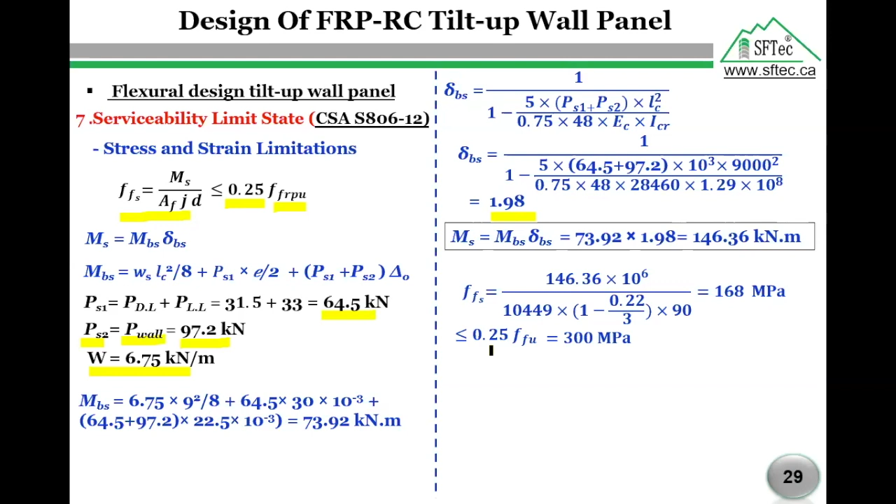Now we have the maximum stress in the used FRP bars under service load, and the elastic modulus is known for us. So we can calculate the maximum strain in the used FRP bars under service load. The maximum strain of the used FRP bars under service load equals 0.0026.

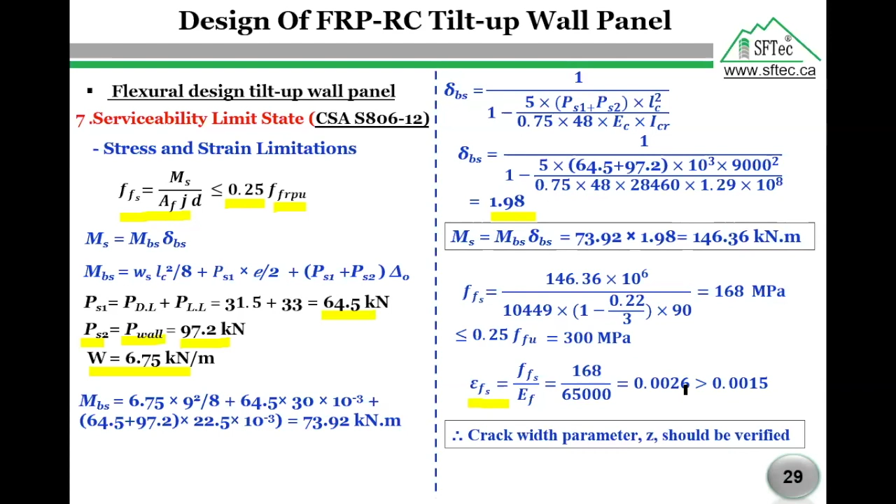When the maximum strain in the FRP bar exceeds 0.0015, the crack width parameter should be verified. So now we are going to check the factor Z. The crack width parameter can be calculated using this equation. So finally, we have Z equals 38,916, which is less than 45,000 Newton per millimeter.

So we did a good job. We have checked the serviceability limit state. We satisfied, we obeyed the maximum limits of the codes, so we are on the right track.

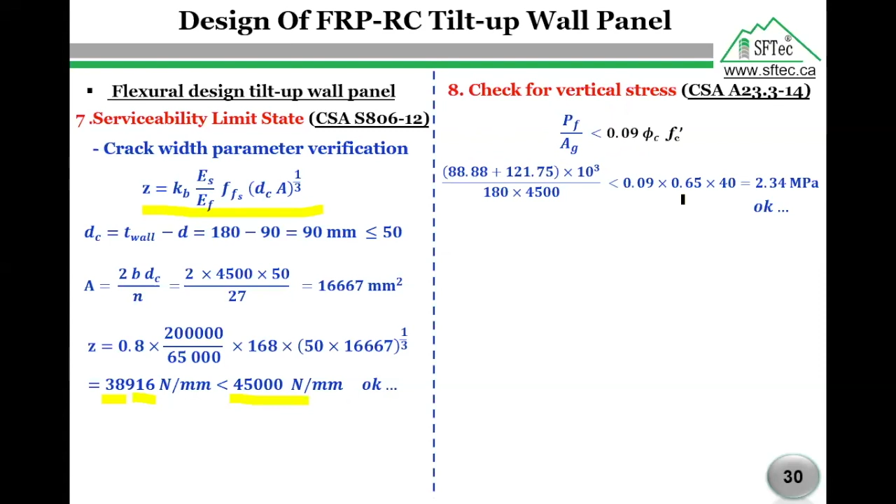The next step is to check the vertical stress. By comparing the allowable vertical stress in the wall and the actual vertical stress, the comparison yielded a safe design. So this one also is okay.

The final step, we need to determine the horizontal reinforcement. As I mentioned earlier, we have a maximum spacing of 300 millimeters, and we assumed using bar size number 4 for the horizontal reinforcement. So a single layer of bar size number 4 is assumed every 300 millimeters at the middle thickness of the wall as horizontal reinforcement.

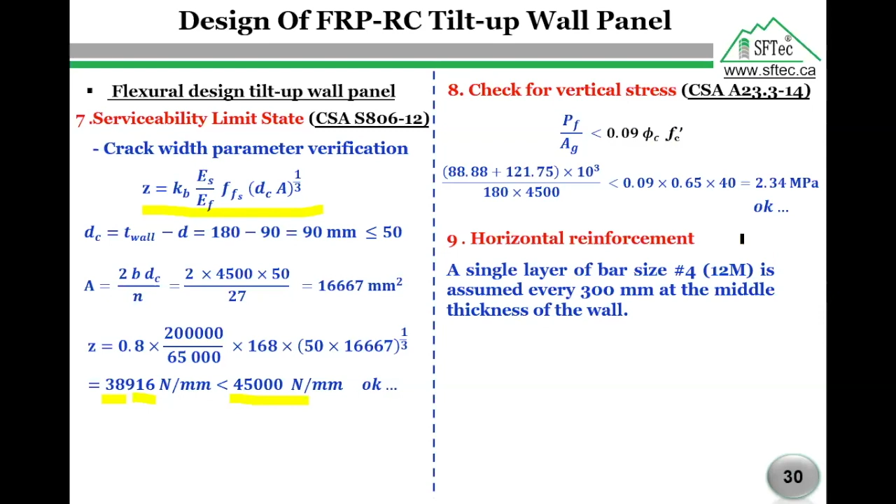Based on the presented slides, the following concluding remarks can be drawn. Number one, FRP rebar is a very good solution to reinforce concrete infrastructure located in harsh environments.

FRP bars have been used successfully in hundreds of bridges, parking structures, pavements, buildings, and foundations across Canada, the US, and other parts of the world.

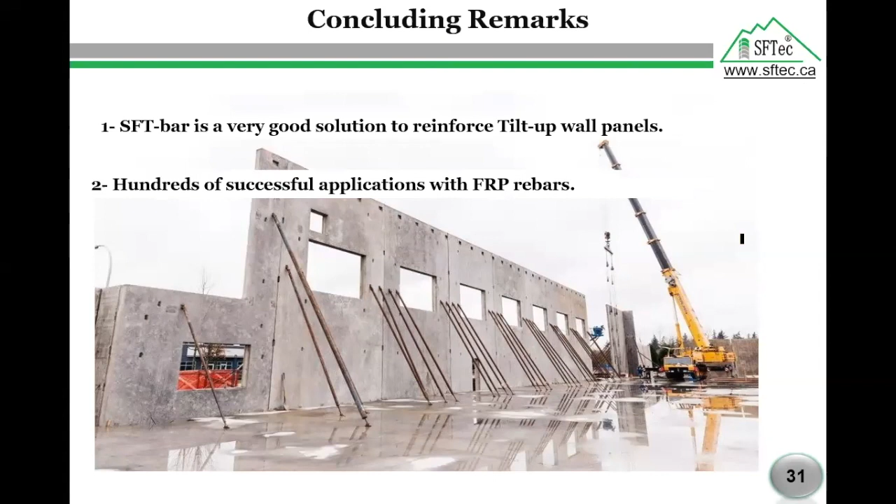In precast buildings, the joint design plays an important role in ensuring that the concrete components act as one piece. In most cases, sealing the joint space is very important.

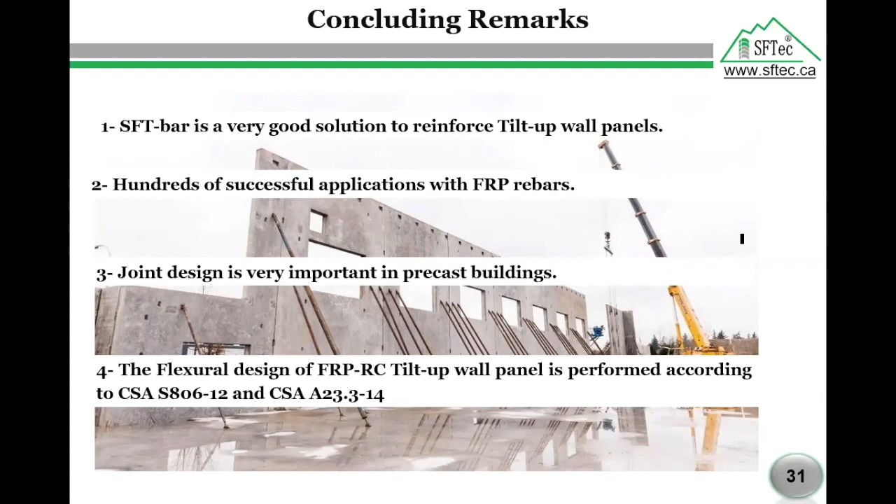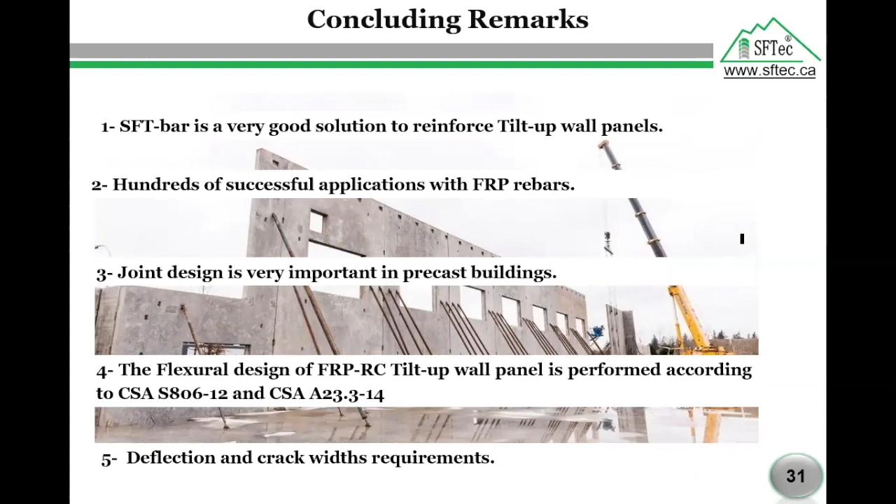The flexural design of tilt-up wall panels is possible now through the Canadian standard S806 along with the design philosophy in the Canadian standard A23.3 to the year 2014. Finally, due to the lower modulus of elasticity of FRP bars, deflection and crack widths will govern the design of tilt-up wall panels. So thank you so much.